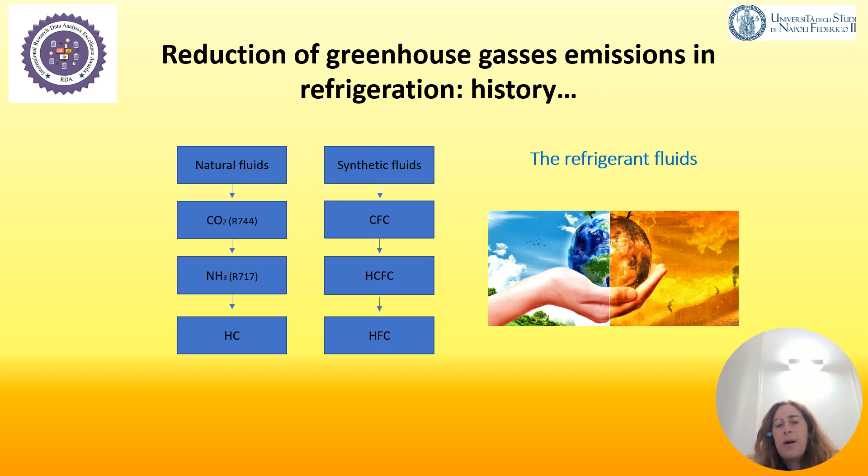Finally, nowadays, hydrofluorocarbons do not contribute to ozone depletion potential, but they present an increased global warming potential. There is a problem in utilizing such refrigerants, and researchers are looking for new possibilities.

The new refrigerant shall present a number of requirements, like being of class A in terms of toxicity and class 1 in terms of flammability, since they should be classified as not flammable refrigerants that do not propagate fire at atmospheric pressure and at a temperature of 21 Celsius.

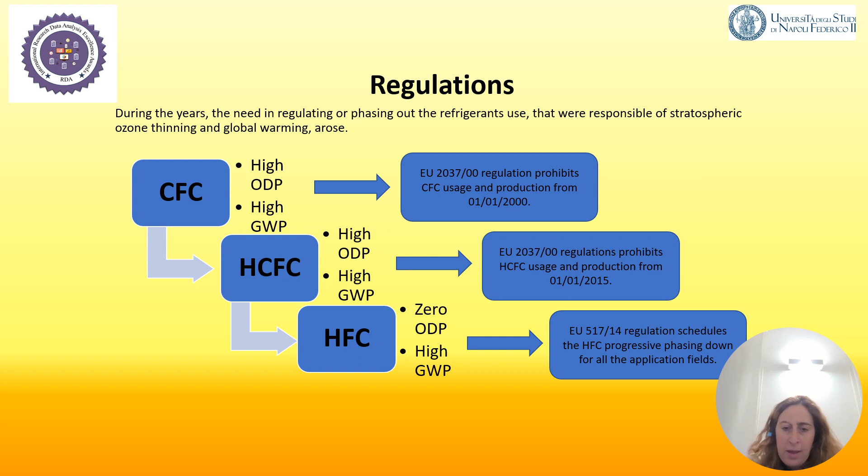Based on such requirements and considering the regulations introduced at the European level, currently the EU 517/14 regulation is applied, which schedules the hydrofluorocarbon progressive phase-down for all application fields where vapor compression is involved.

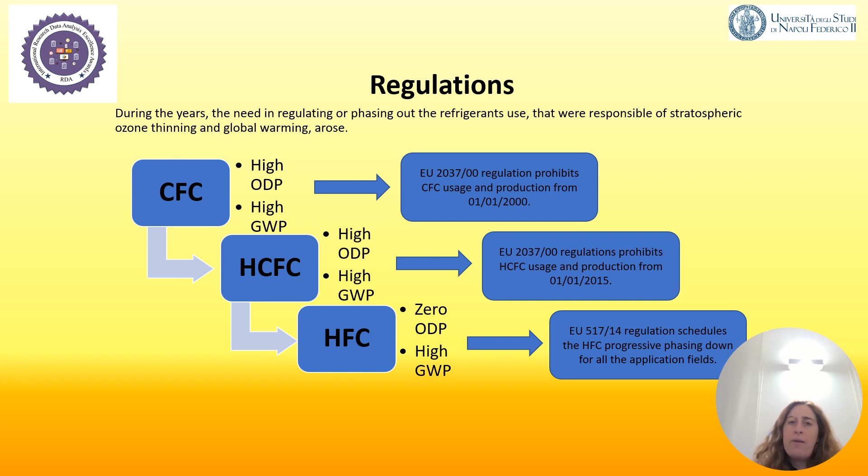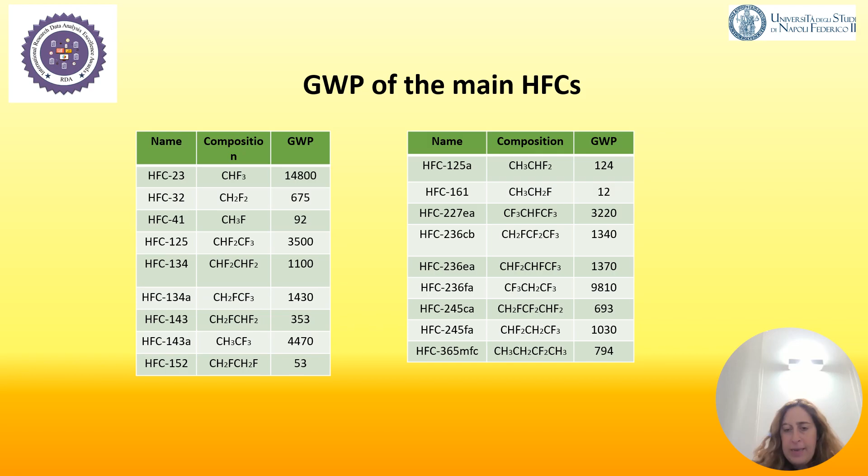Among the main substitutes of hydrofluorocarbons, there are natural fluids like carbon dioxide or hydrocarbons that have zero to low global warming potential and are low cost, but the main con is that they are not retrofitting systems, so it's not possible to employ them as drop-in.

On the other side, we can observe hydrofluoroolefins, refrigerants derived from propene that can be directly replaced as drop-in for actual hydrofluorocarbons. But the main con is that most of them, considered as pure refrigerant rather than mixed, do not belong to the A1 safety class.

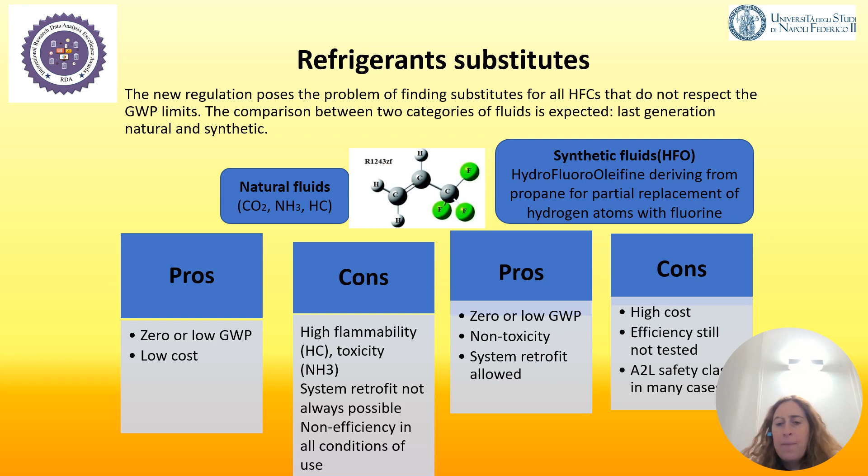So they present a lower moderate flammability that is not very prescribed for domestic usage.

In this slide, we can observe the hydrofluorocarbons that are replaced by the hydrofluoroolefins. The most famous are YF and ZE. As we can observe, most of them belong to A2L safety class, but their GWP is very, very low.

In this slide, we can observe low-medium global warming potential mixtures derived from the above-mentioned refrigerants, representing a right balance between the pure substances and the refrigerant to be substituted. The global warming potential is moderate, but not as small as the previous values shown.

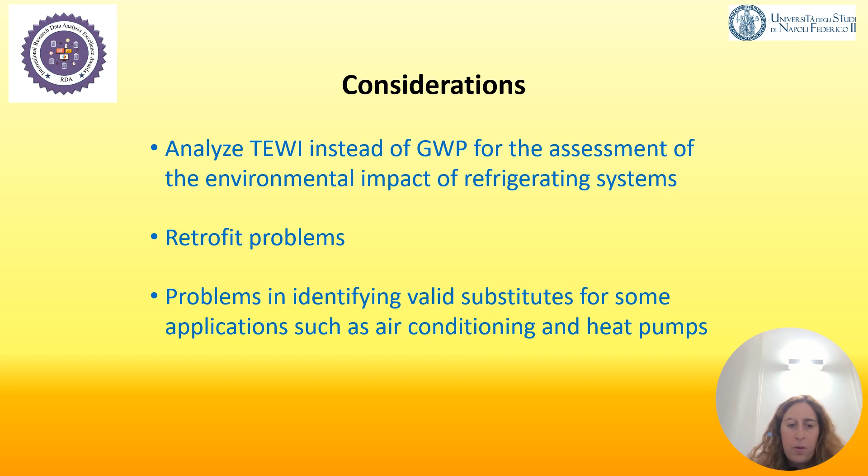For this consideration, we can observe that there is a problem in terms of TEWI, and we should analyze the TEWI instead of global warming potential for the assessment of environmental impact of refrigerant systems. The retrofit problem is also a very strong theme. In this context, we can wonder why we do not change the approach.

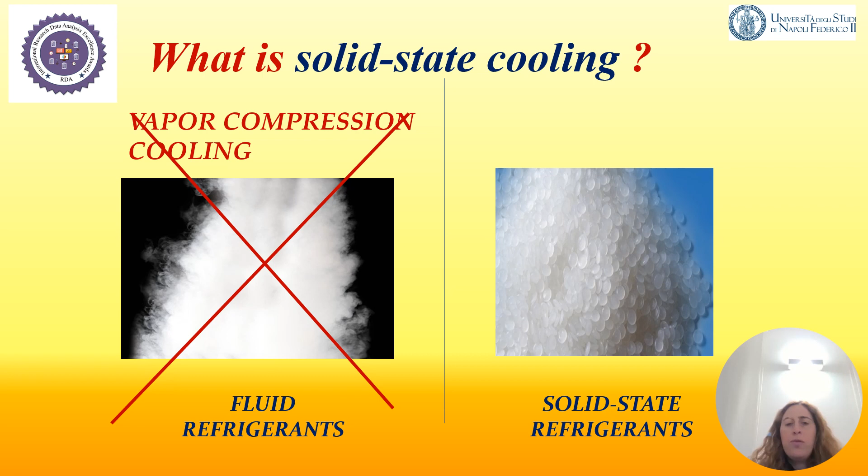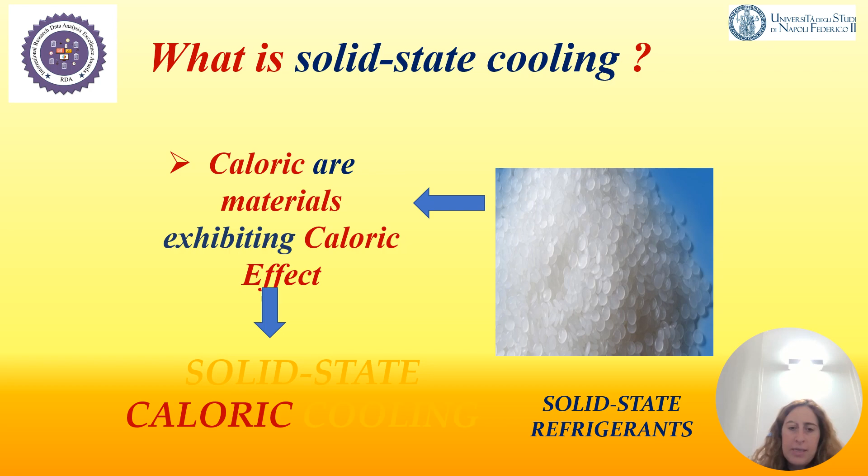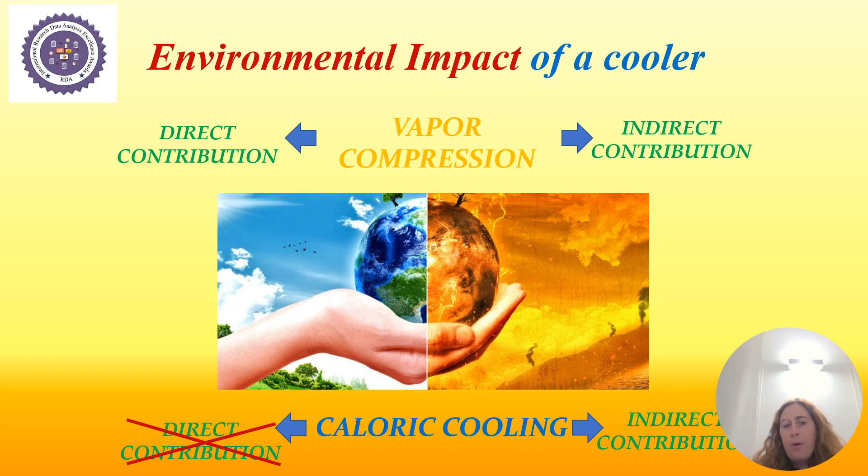In this context, vapor compression cooling could be replaced in the future by solid-state cooling. Solid-state cooling is based on solid-state refrigerants that are caloric materials exhibiting caloric effect. Since they are solid-state materials, they do not contribute directly to environmental impact. They do not provide a direct contribution, unlike vapor compression which provides both direct and indirect contributions. So this is just the first advantage in utilizing them.

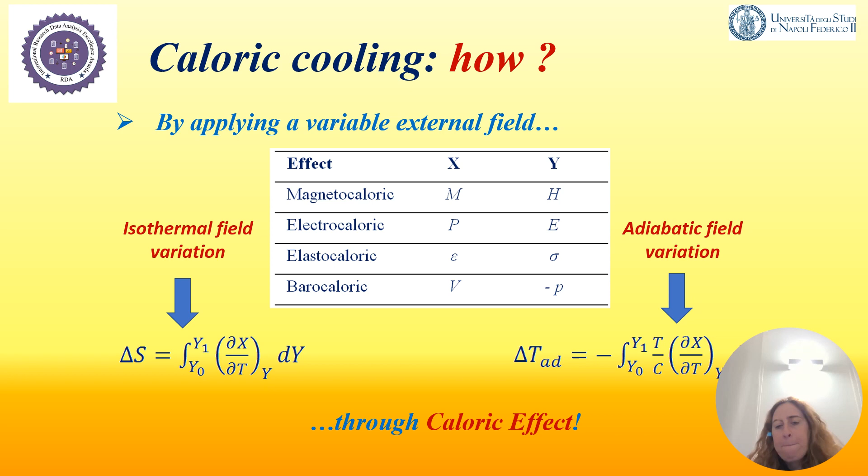Moreover, we can observe that a variable external field is characterized by different natures of field, like magnetic, electric, mechanical, and hydrostatic pressure based. The variation of such external field provokes magnetocaloric, electrocaloric, elastocaloric, and barocaloric effects that manifest themselves as a temperature change under adiabatic transformation. So adiabatic temperature is a direct measure of the caloric effect.

In this slide I represented the four possible effects: magnetocaloric, through the application of a magnetic field, electrocaloric, elastocaloric, and barocaloric.

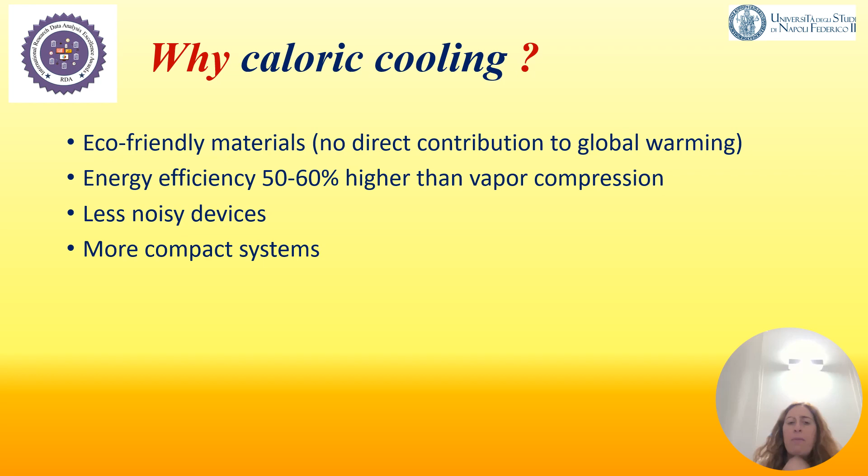The main pros in utilizing caloric cooling are the possibility of basing it on eco-friendly materials that do not provide a direct contribution to global warming, the possibility of registering energy efficiency 50-60% higher than vapor compression, as well as less noisy devices and more compact systems.

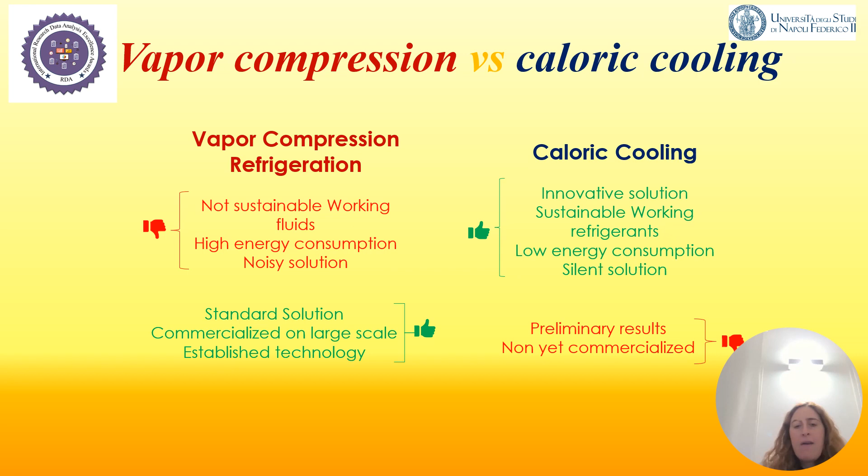In this slide are reported the vapor compression versus caloric cooling pros and cons. The main con is that this second technology is not yet commercialized since the TRL level is still quite low.

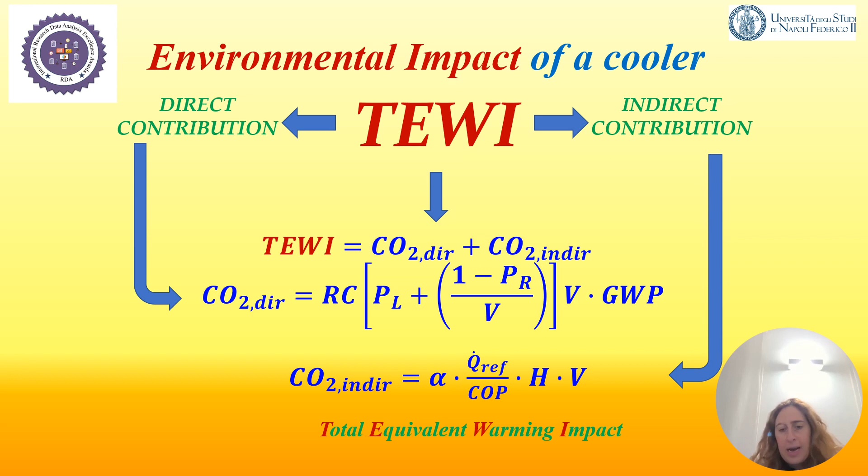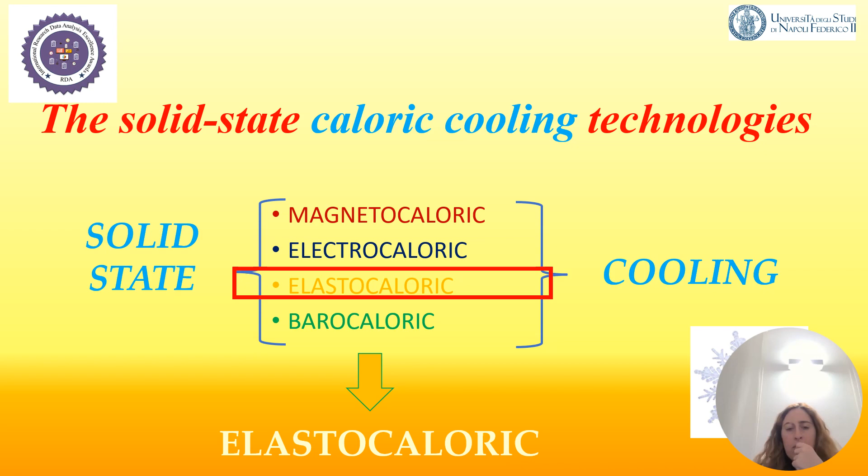In this presentation, we can focus on multicaloric, but moreover also on elastocaloric. Elastocaloric is the main trend among studied technologies.

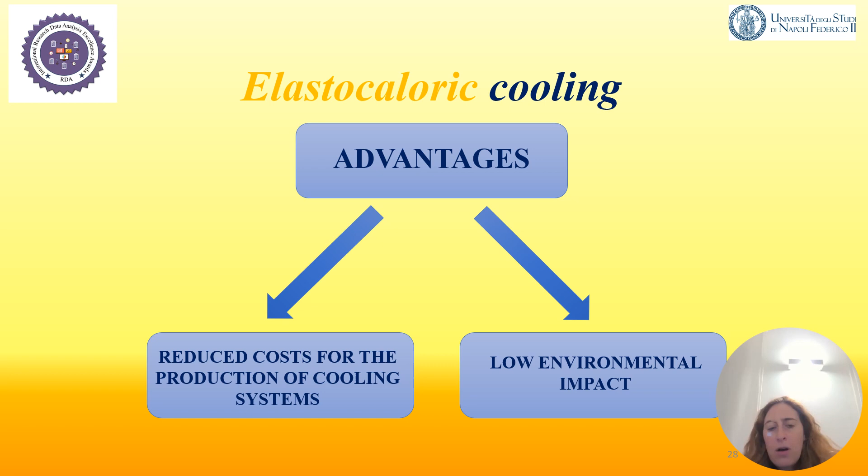Elastocaloric cooling is based on shape memory alloy material exhibiting the elastocaloric effect. The advantages are also reduced cost for the production of cooling systems and low environmental impact.

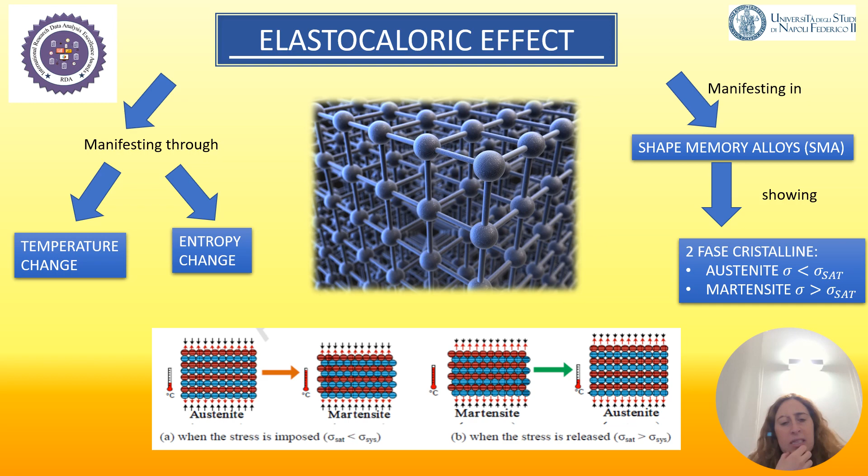The elastocaloric effect manifests itself through structural change represented in two crystalline phases like austenite and martensite, and shape memory alloys have the main property of being able to recover their shape after the stress forcing them is removed.

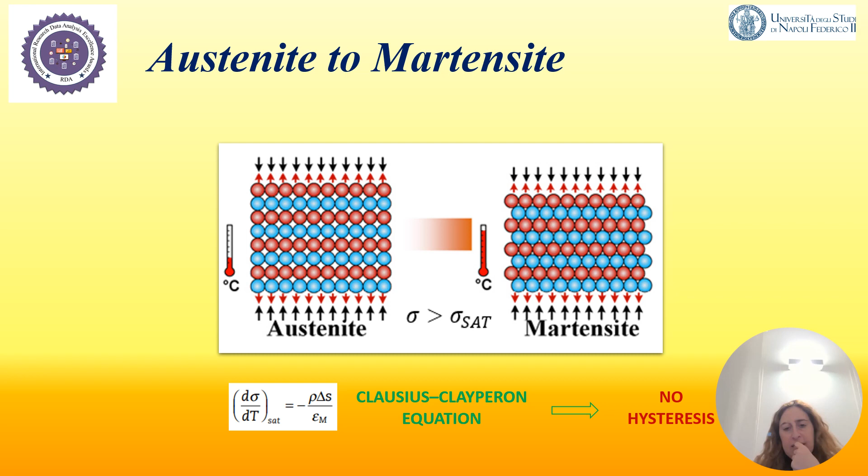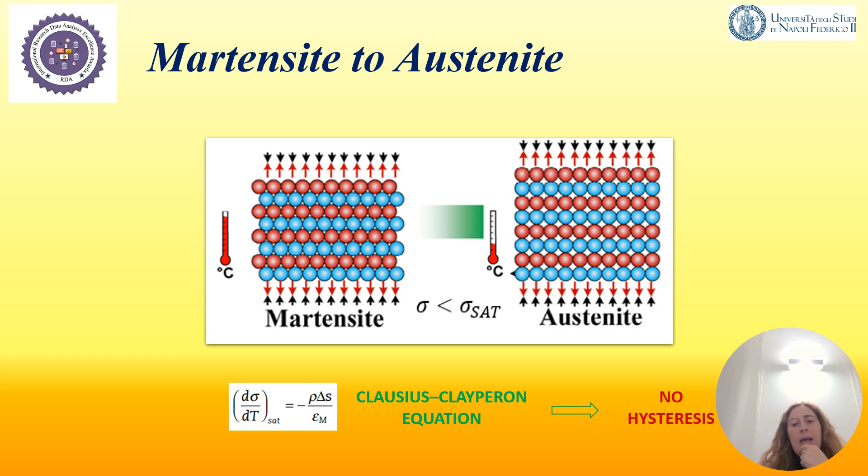Here I reported the austenite to martensite phase structural change and the martensite to austenite change. When the material passes from austenite to martensite, an increment of temperature due to the elastocaloric effect is registered. When the structural change goes from martensite to austenite, a temperature decrement is observed. An adiabatic and isothermal process describes the elastocaloric effect.

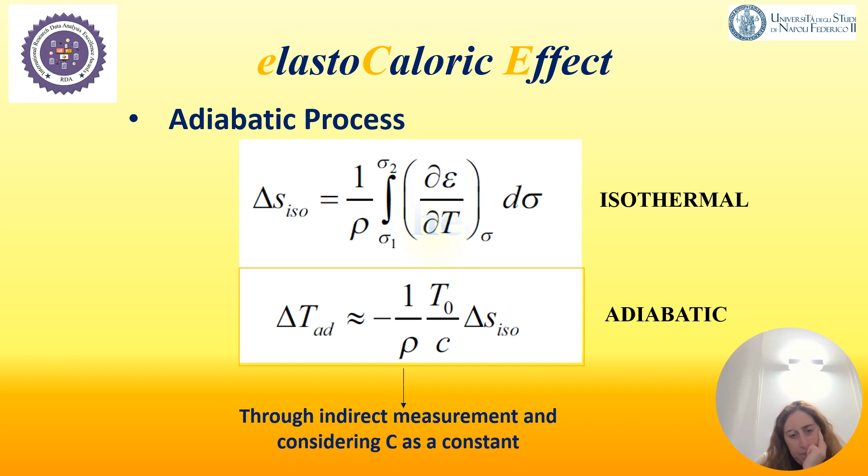Two possibilities are the main routes for realizing an elastocaloric device: fluid to solid heat transfer, or solid to solid heat transfer. The first solution is based on...

...the elastocaloric material is forced through an external stress and it increases its temperature by the elastocaloric effect. Then in the cold-to-hot flowing step, an auxiliary fluid flows from the cold side toward the hot side.

In the third step, the unloading, the material decrements its temperature due to the elastocaloric effect. So in the fourth phase, when the fluid flows from the hot toward the cold side, the fluid cools enough to allow heat subtraction on the cold side, thus realizing the cooling effect.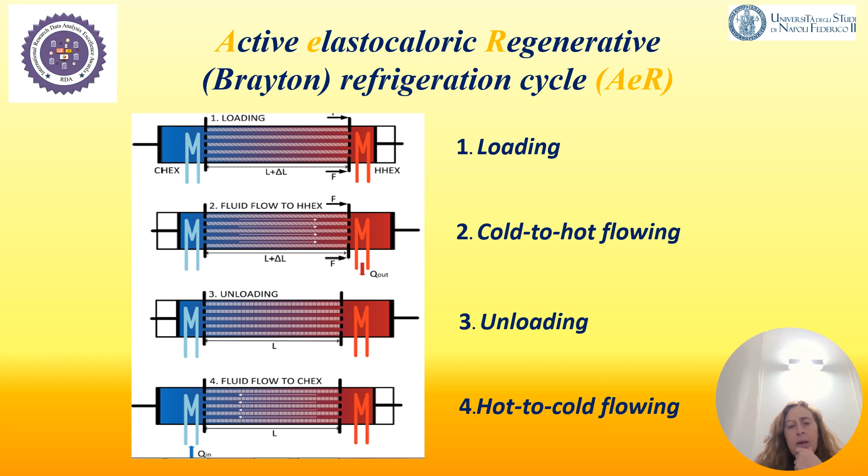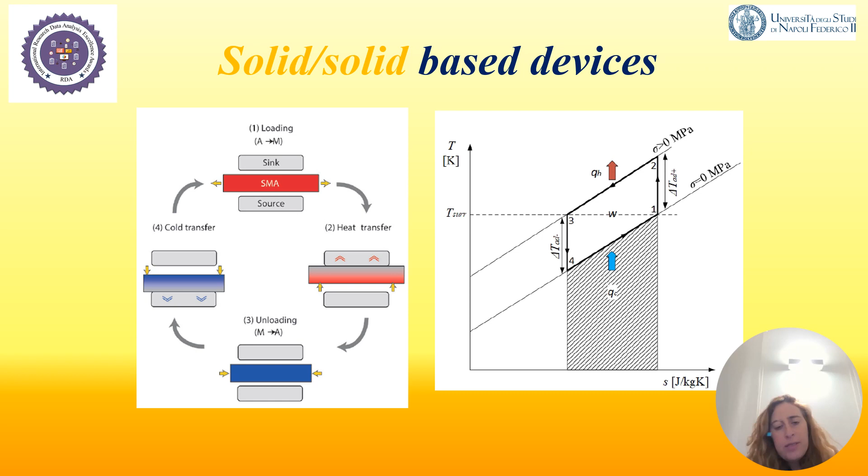On the other side, the second choice is based on a solid-solid device where there are just solid materials, not fluid, moving from a sink to a source, and the heat transfer mechanism that regulates the heat fluxes is conduction.

Most of them belong to shape memory alloys.

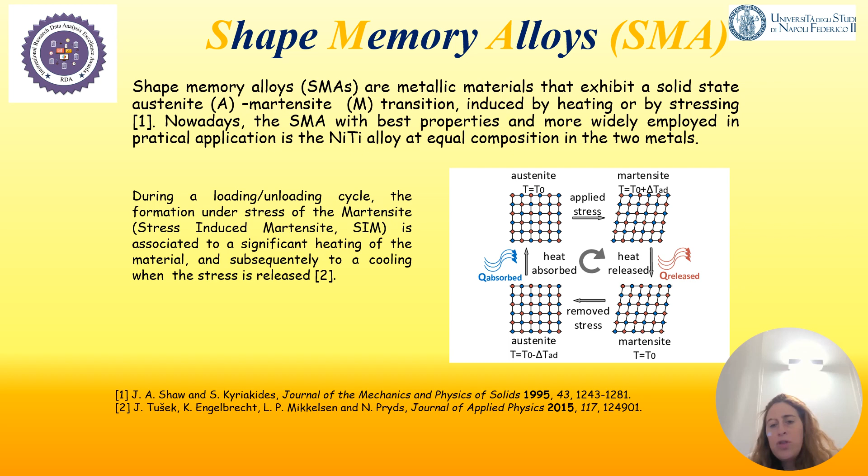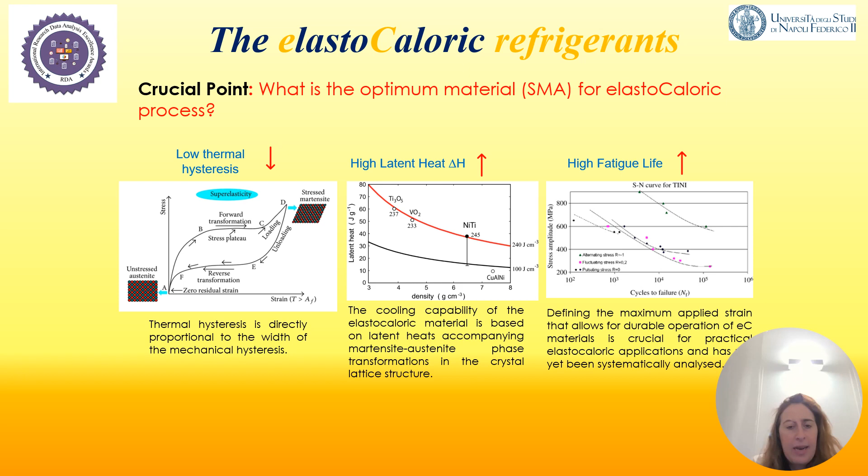Among them, the benchmark of elastocaloric technology is the nickel titanium alloy, because of the high adiabatic temperature change shown by such SMA.

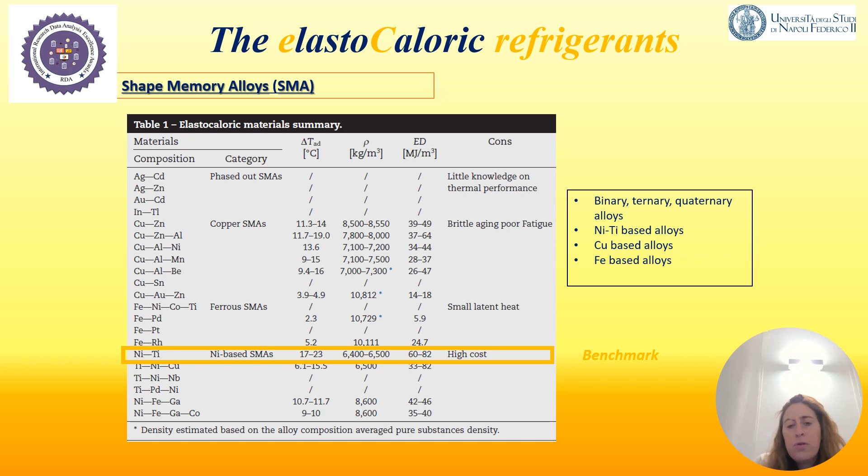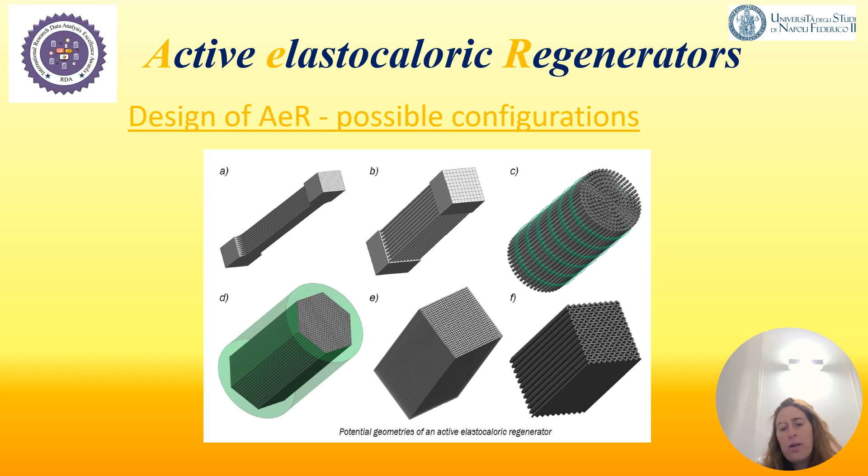Also, we can focus on the type of loading, which could be tension, compression, bending, or torsion. Among the types of loading, the most investigated are tension versus compression.

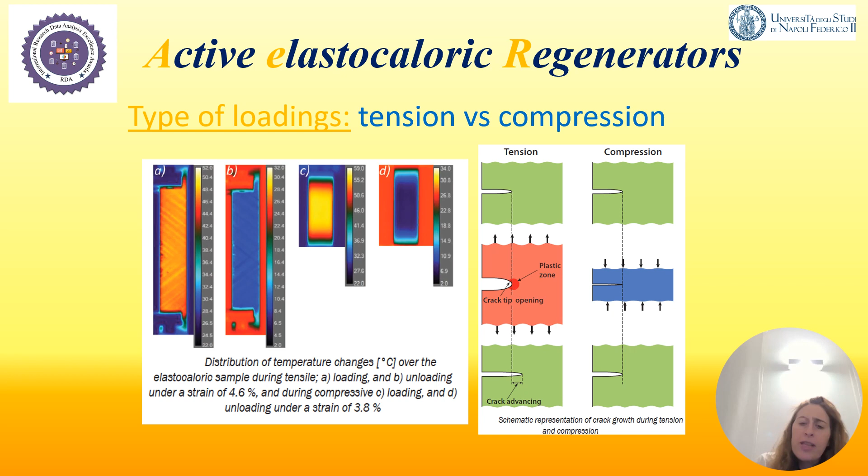One of the cons shown by the tension loading type is crack propagation. So if a material accidentally breaks, the continuous tension cycle allows the propagation of the cracks, and so total breaking of the material is reached faster rather than in compression, where the crack can be confined...

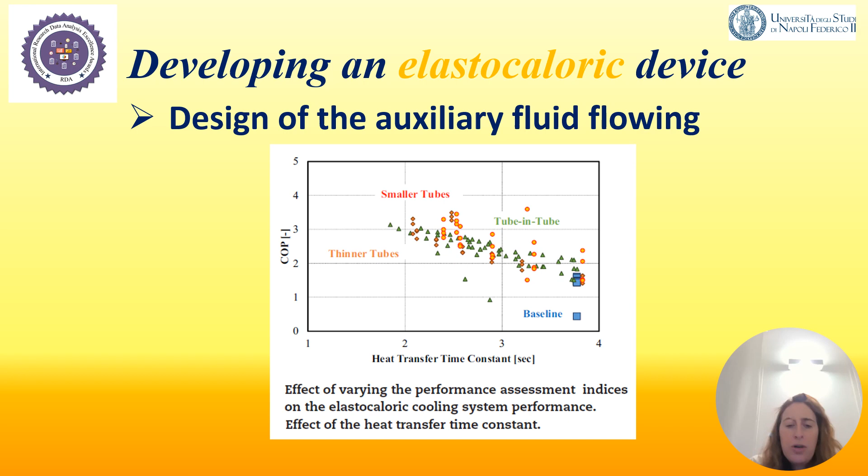...for a longer time. Also, another topic of the choice is the auxiliary fluid, which shall be well designed, and also the circuits where the auxiliary fluid should flow must be optimized in terms of dimension, type of auxiliary fluid, pressure drops, and operative conditions like velocity and frequencies.

Here I reported some auxiliary fluids, but at room temperature, for most of the cooling field, the main employed auxiliary fluids are air and water.

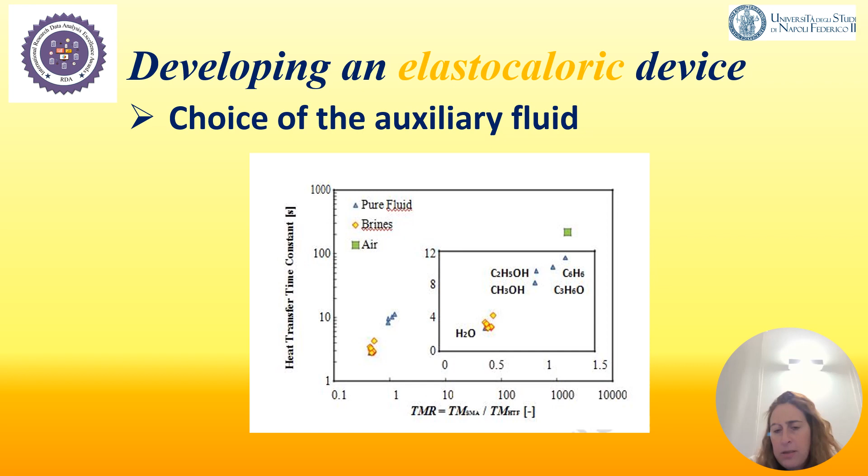Here I reported an example where in a tube containing tubes of nitinol, nickel titanium, the water can flow inside or outside the tubes.

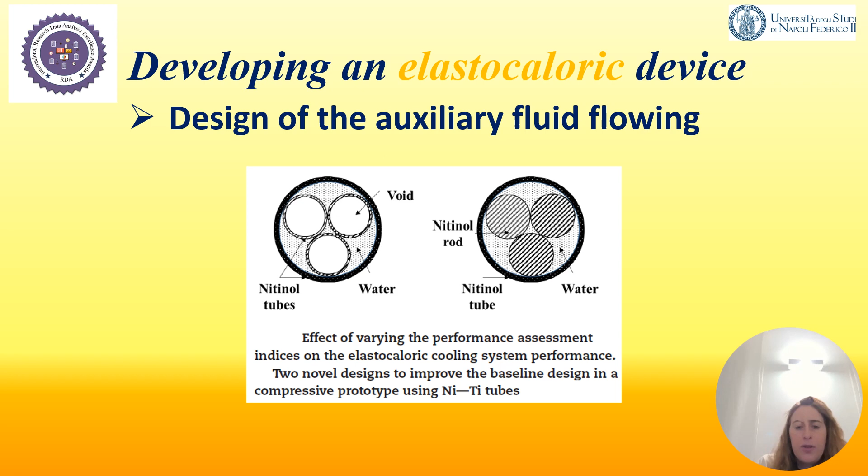Also, this technology shows around a small, restricted number of devices, and in this slide I reported the main numbers on this topic.

Here is shown the diffusion of elastocaloric prototypes, and we can observe that this is really a challenging topic currently. Here is reported the state-of-the-art of elastocaloric devices, most of which are distributed in Europe, but also in the United States. There are pioneers of elastocaloric technology.

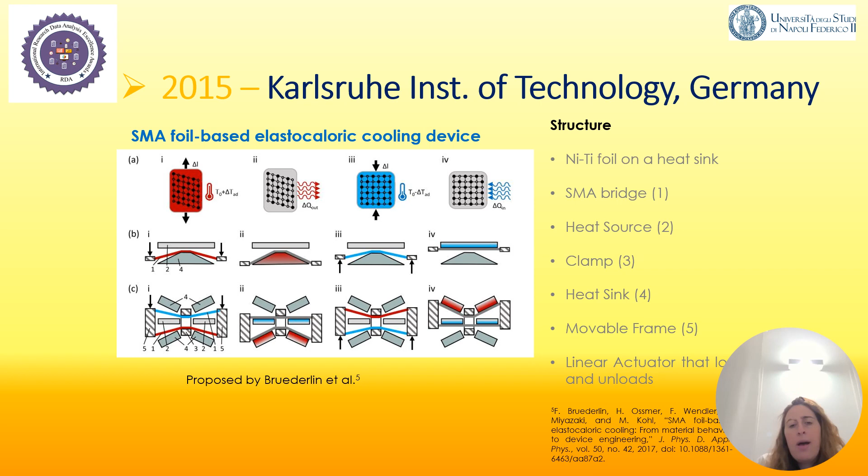Here is reported one of the very first solid-to-solid elastocaloric devices, like the one from Karlsruhe Institute of Technology, Germany, where an SMA foil-based elastocaloric cooling device shows the moving of an SMA foil, and the elastocaloric effect is applied for subtracting heat from a cold sink. Here is reported a picture of this device.

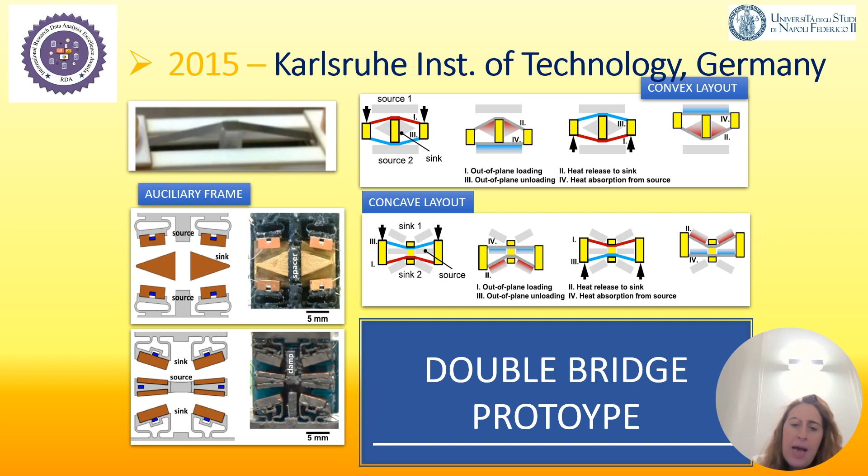Then an upgrade succeeded this first choice, and a double bridge prototype was created rather than a single bridge one. Here is reported the comparison between the single and double bridge configurations, convex and concave.

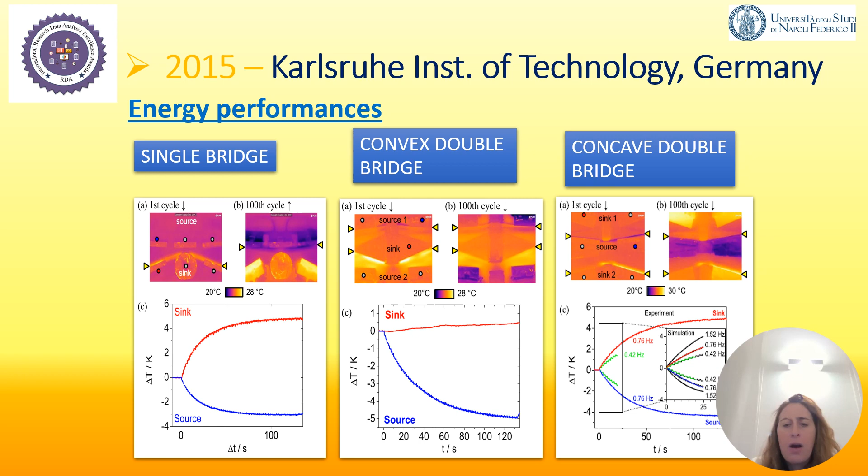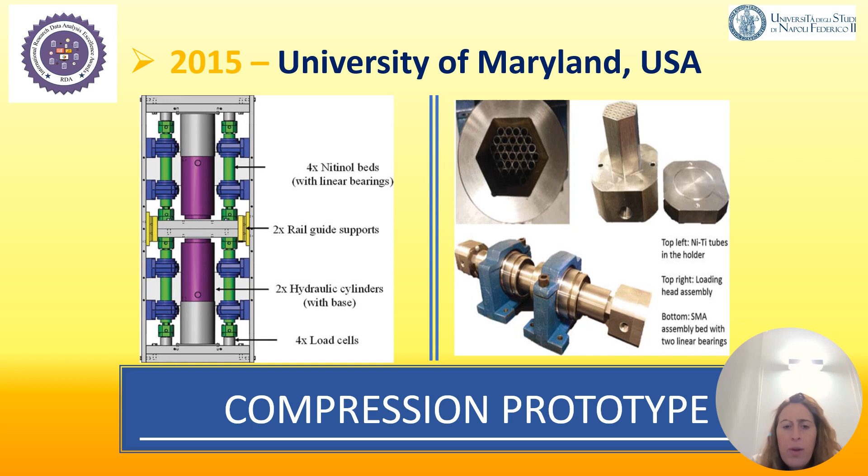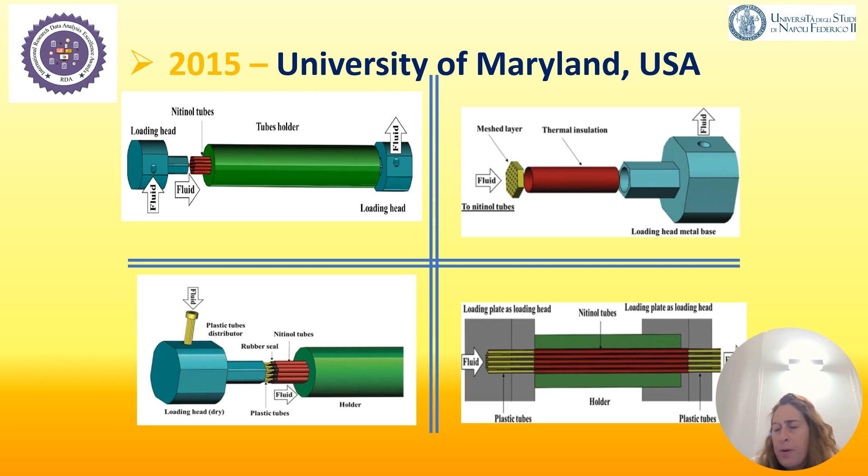Here is reported the very first compression prototype realized at the University of Maryland in the United States, where we can see that four nitinol beds are crossed by water within hydraulic cylinders. This is a longitudinal schematic of the Maryland prototype.

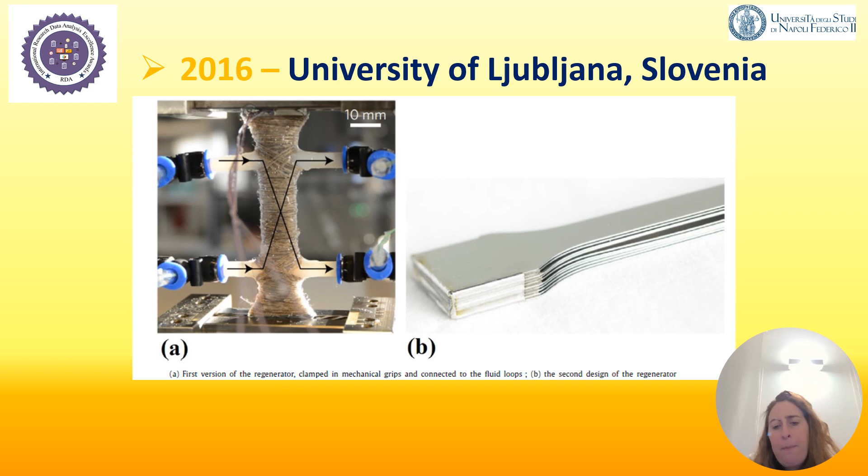And here we can observe the University of Ljubljana, Slovenia, flat plate prototype, which is the very first version of a parallel plate elastocaloric prototype based on an active elastocaloric regenerative refrigerant cycle.

But in this context, we can wonder where Italy is going to fit. As a matter of fact, the Italian contribution toward elastocaloric research is mainly supported by research from the University of Naples Federico II, within the development of two projects: SUSSTAINEBLE and CheckTemperature.

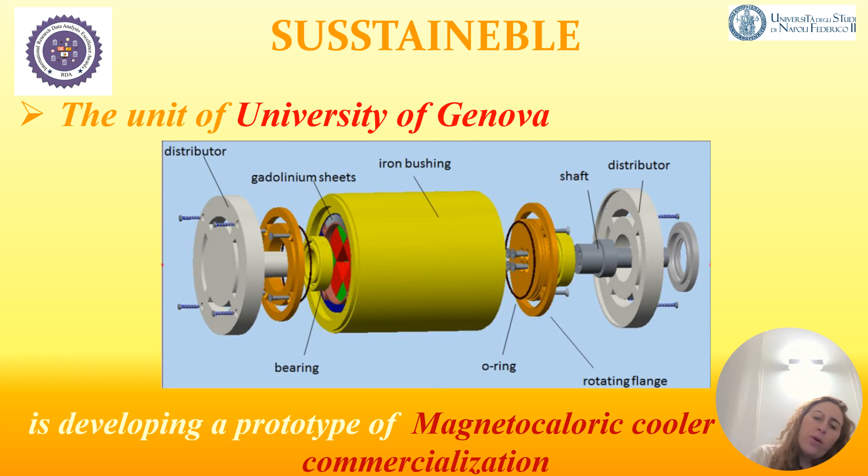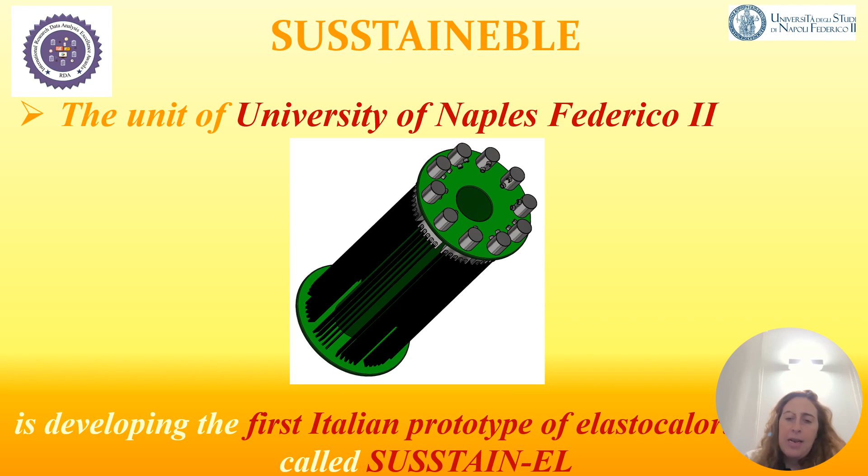The first unit is occupied with realizing a rotative magnetocaloric cooler that could be close to commercialization. The second unit is our unit, which is going to realize SUSSTAIN-EL. And the third unit is the National Research Council of Naples, which takes care of testing both magnetocaloric and elastocaloric materials that would be most suitable for developing the device.

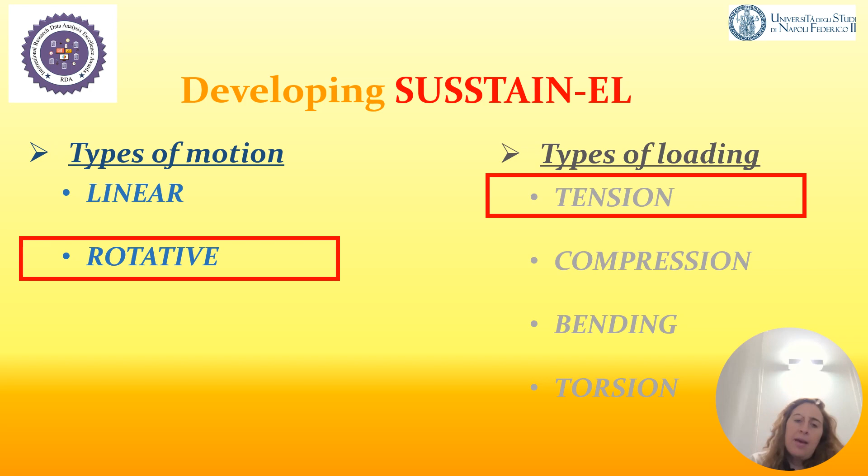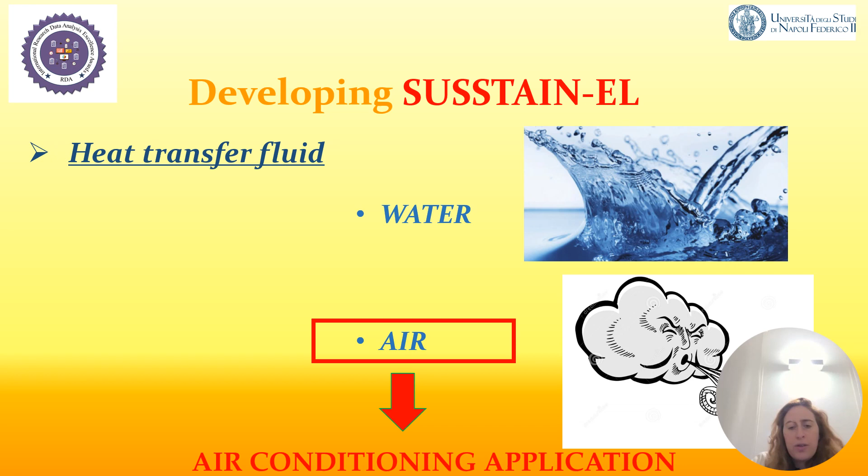Developing SUSSTAIN-EL is a really interesting challenge, since this device is rotative and tension based. It considers air as its heat transfer fluid, so we can have a direct air conditioning application, and it mounts nitinol based wires.

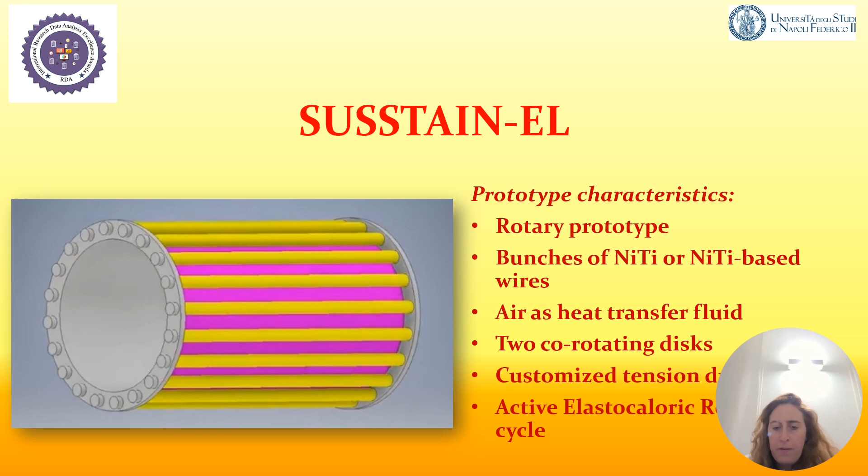Here I reported the main characteristics of the SUSSTAIN-EL prototype, summarized as the main points I introduced before. Many parameters are to be investigated and are reported here, like number of wires, dimensional parameters, working parameters, and also the composition of the elastocaloric material.

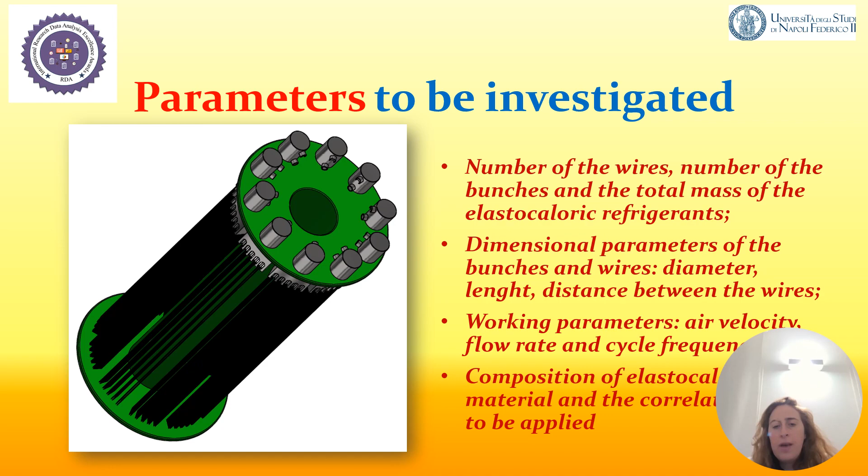The investigation of all of these parameters led to the realization of the optimized project, and the experimental data of this prototype will be introduced soon.

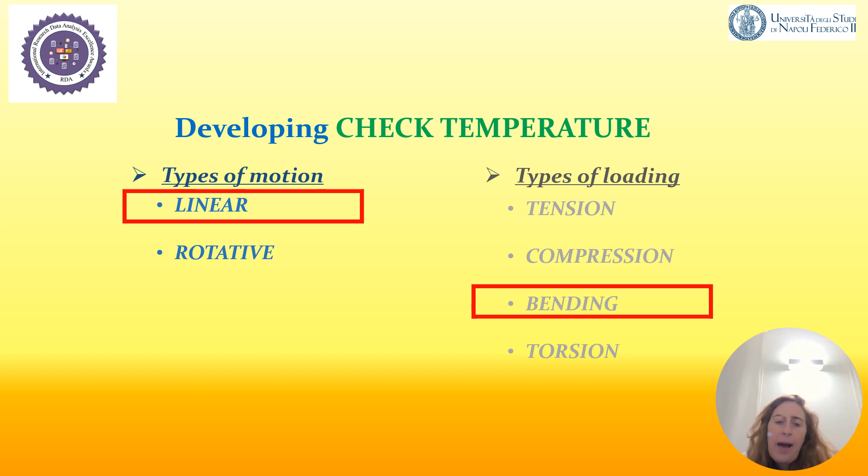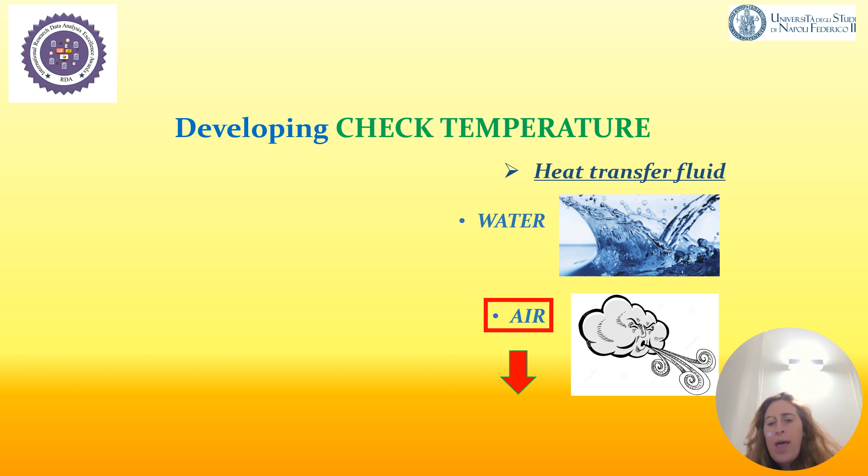CheckTemperature, different from the previous device, involves a linear motion of the auxiliary fluid, and is based on bending, like forcing a wire in a fixed way. Air is still the heat transfer fluid, so to directly allow the electronic device cooling, and the device mounts a benchmark nickel titanium.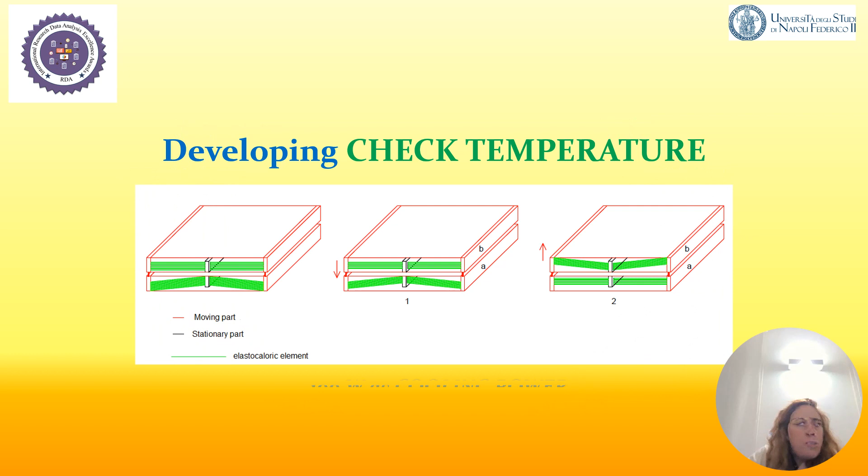Here I reported some sketches of the prototype that is targeted to refrigerate with 100 watts cooling power.

Additionally, the very latest project I'm going to introduce is called Multical, which is based on the realization of an eco-friendly heat pump based on the multicaloric effect. It's also a project coordinated by myself, and here two simultaneous caloric effects are applied.

Multicaloric can be, for example, the simultaneous application of magnetocaloric and elastocaloric effects in order to increase the coefficient of performance of the device, so as to experience the same temperature jump with a lower mechanical requirement: lower work, higher coefficient of performance. So this is the future, and in the future, all the progress will be promptly reported.